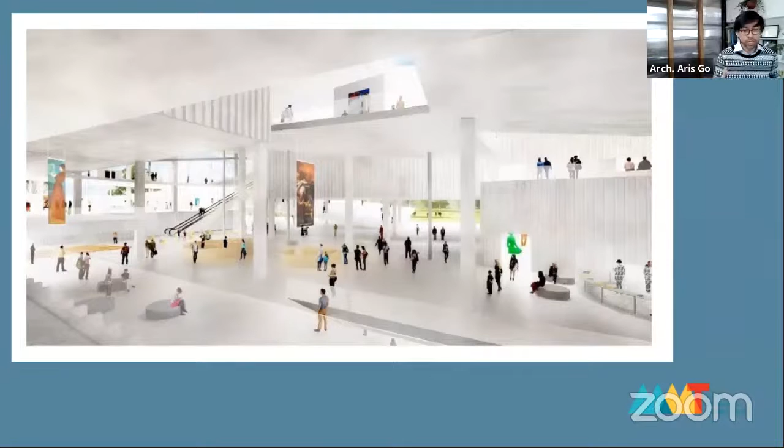It can be a place for confrontation and challenge, a place for contemplation, a place for study, or a place for rest, or simply an opportunity for dining, meeting up, or even shopping. So as we shall see, how we put together a museum can distinctively define it.

In this module, we've selected some aspects of museums that are of interest to us. Afterward, we'll discuss the more particular and specific considerations that can be unique to a project. I'll be ending with a few case study projects that we have done, including the Museo Kordilyera.

The experience of artifacts is inseparable from the spatial experience of galleries where they are exhibited. This interaction of the building form and the exhibits gives each museum and each of its galleries its own character. So this is a project we proposed for SEARCA in UP Los Baños last year.

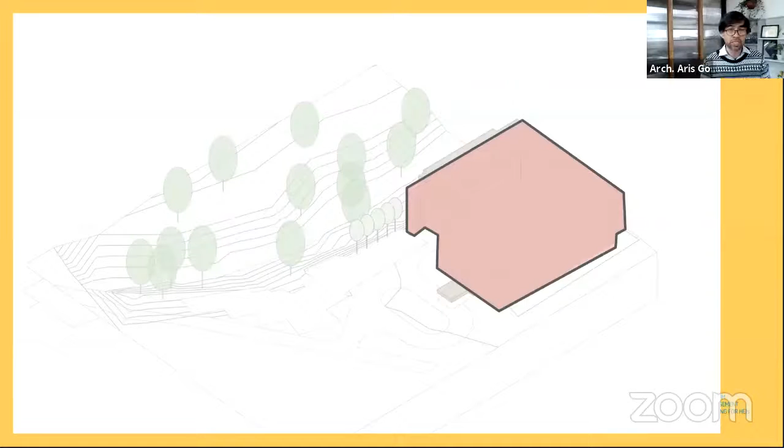They were looking into adding a museum structure to their existing building, which was already in the initial stages of construction. Before proceeding with the extension, they requested us to propose a design working with this narrow section of an existing parking lot—this section on the left.

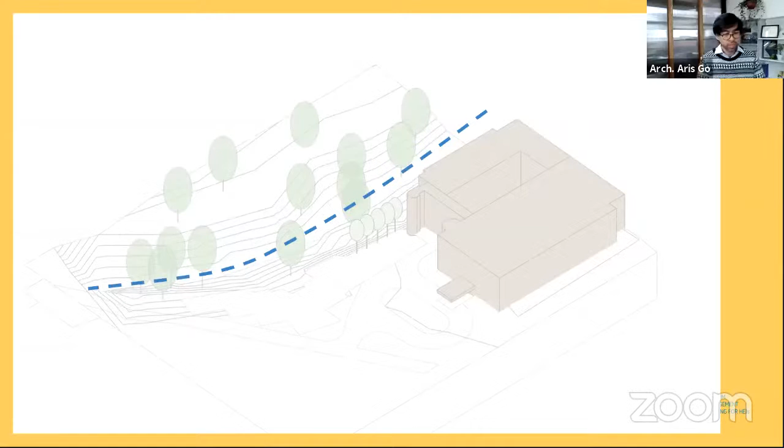This is located between a heavily planted creek behind and a driveway in front, so it's a very narrow section, only around 7.5 meters.

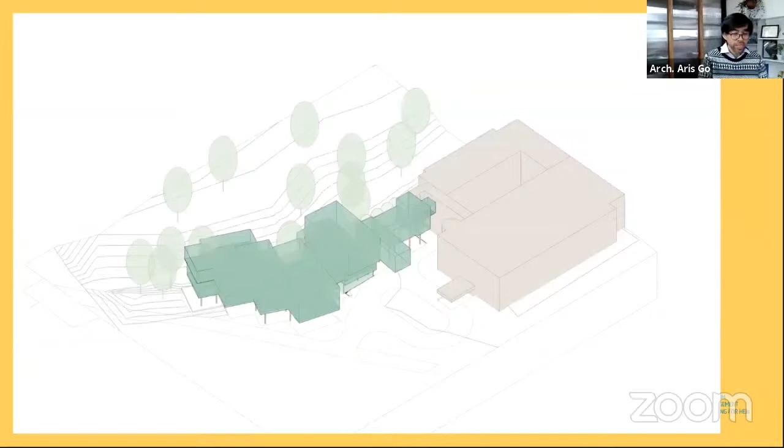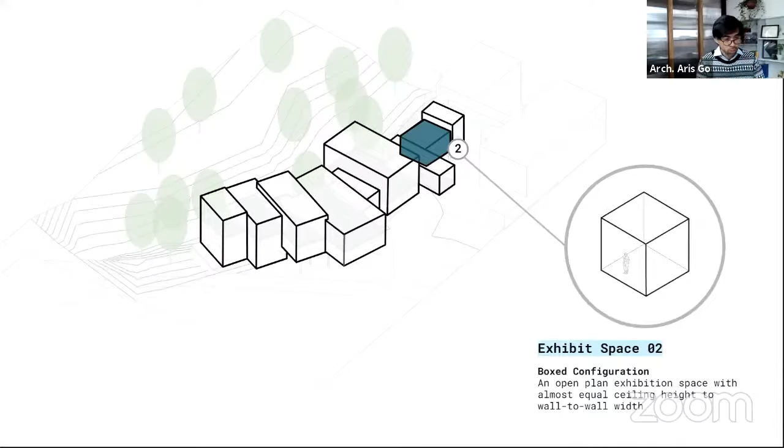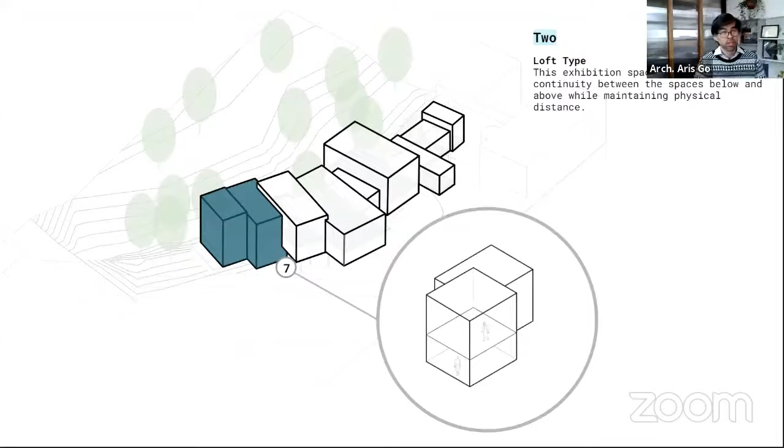So what we proposed was to have various galleries in succession through this narrow lot, while retaining most of the open space below. This creates a variety of spatial configurations: tall and narrow in a cube or box configuration, a linear box, a grand exhibit space with a triple height ceiling, an irregular box, interlocking spaces with a slight difference in elevation, and combined boxes with a loft that allows visual continuity between the spaces below and above.

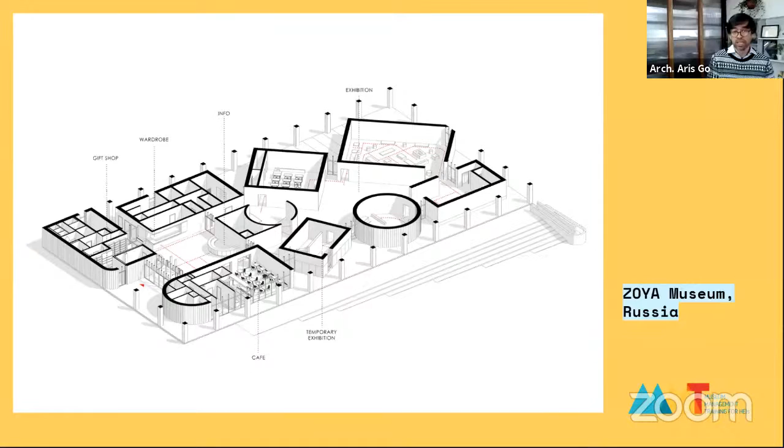By creating these varying interconnected spaces, we can minimize museum fatigue, described by a decrease in visitor interest toward exhibits. It's important to consider space adjacencies and create variation in light and spatial configurations between circulation and exhibit spaces, because monotony may lead to operational efficiency, but it can also lead to visual and emotional fatigue in the users.

The variations of openings and exhibit spaces can create comfortable visual transitions for visitors and potential views of the outer environment, acting as a point of relaxation for the eyes, but also elicit emotional responses as the spaces expand and contract.

Another consideration we think is very important to a lot of projects, not only museums but also other buildings, is how people would access it.

This is through transportation. Here in the Philippines, a great majority of our transportation needs are met by cars, buses, trucks, and jeepneys, and probably a negligible amount via trains and mass transit systems, which are limited to highly urbanized places like Metro Manila. We've been extremely dependent on cars, and providing parking spaces has in most cases been high on the list of priorities because there are limited options at the moment.

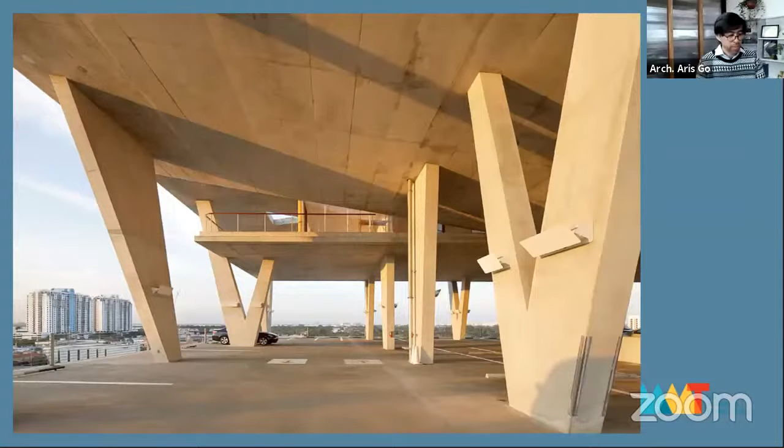This is a building in Miami—the Lincoln Road parking building exemplifies this well. The garage is a fully open concrete structure, and ceiling heights vary between standard parking height, double, or even triple height, as pictured here, in order to accommodate other programs permanently and temporarily.

There are retail units and private residences located on the upper levels, and the structures can also be used for parties, photo and film shoots, fashion shows, concerts, and other social and commercial activities, all while offering amazing views as a backdrop.

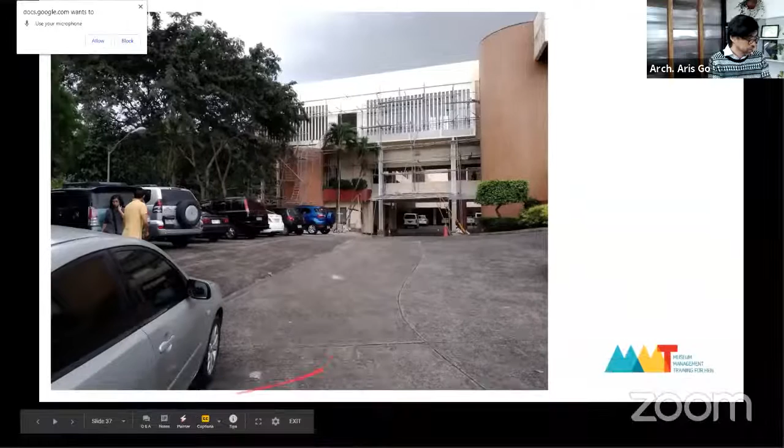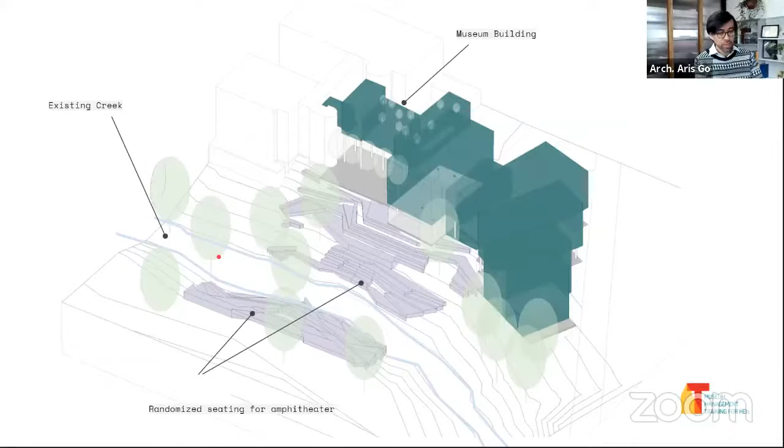Going back to SEARCA's museum, the management decided to still have parking at the street level because they wanted to maintain it in this area, despite having other parking options elsewhere. But we decided to propose an alternative that would be better for the project and the people using it, taking advantage of an otherwise dead space.

By leaving this space open and creating a public plaza connected to the creek behind the building, we designed this connection by creating an amphitheater-like valley that functions as an activator space, allowing people to rediscover this once neglected space.

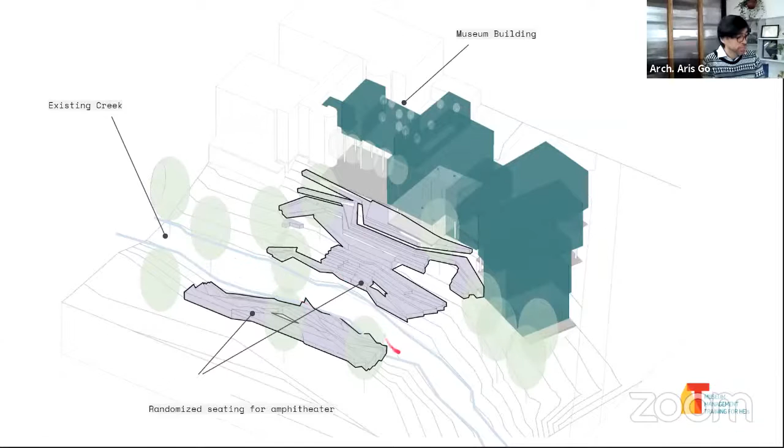Our hope is that in this rediscovery, people would be made aware of the creek that is otherwise relegated to either being a storm drainage or a sewer line. This would not be possible if we simply accepted it as a parking lot or let it remain a parking lot. We wouldn't be able to create this kind of connection.

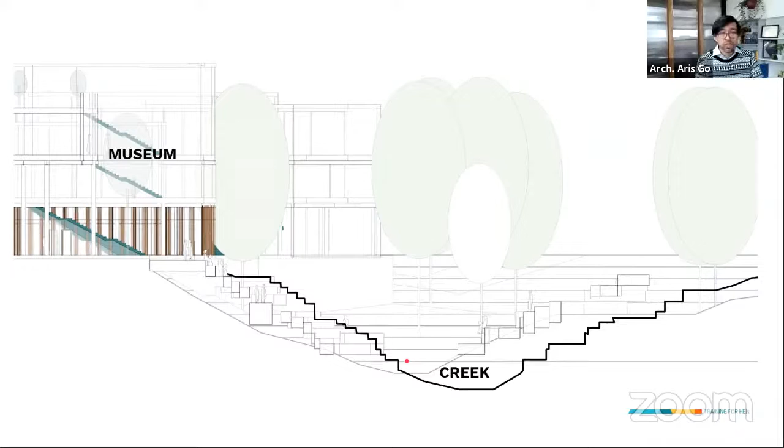Now think about this in your own city or town, wherever you are. Most of our towns have creeks like this running through the middle, or bodies of water running through our cities, which we ignore, neglect, or sometimes don't even see. In the case of Manila, they're all underneath the concrete.

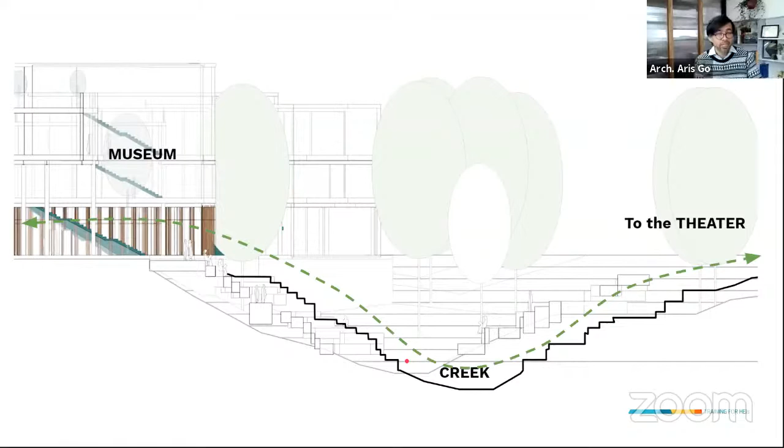So what's good about this proposal for SEARCA is that directly behind it is the UPLB Theater, the Umali Hall. You can just imagine the possibilities here. With this kind of connection, we could interconnect them and create an outdoor theater. So we have a museum, an outdoor theater, and a creek between them, although of course the creek will need cleaning—well, it needs it anyway.

So it rehabilitates and changes people's ideas or concepts of how we use our creek. Instead of having fear, we embrace the creek, and instead of creating concrete walls, we create amphitheaters so we can use it during non-storm circumstances.

Another aspect to consider when designing buildings, especially museums, is daylighting. Employing daylighting, with its characteristic color rendering, cannot be easily replaced by artificial means, because its continuous spectrum illumination from natural light provides unbiased color registration for all colors. Although there are variations in daylight throughout the day, the human eye can easily adapt to these changes and maintain accurate perception of an object's color, especially with daylight.

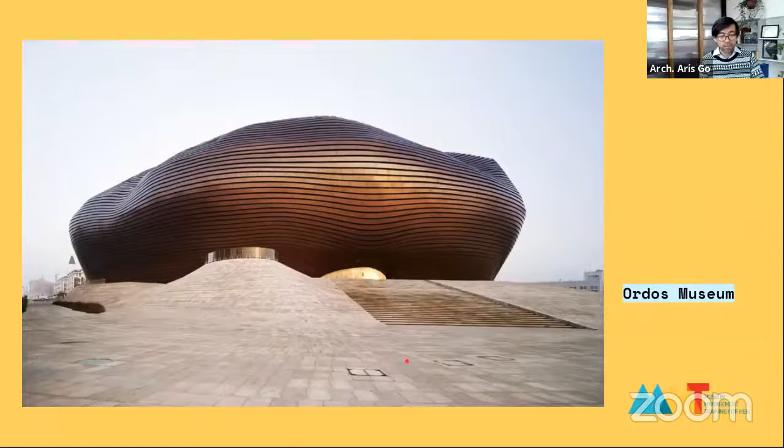Another thing to consider is iconic buildings. Within the last decade, especially since the Guggenheim Museum in Bilbao in 1997, there has been this class of museums whose civic role has been to become symbols or icons of cities and cultures, designated by their own architectural identity and value. In most cases architecture like this is good, and sometimes the building itself is the artwork, creating a place of mass attraction. This has sparked a lot of debate among designers and architects regarding the merits of creating something iconic, so careful consideration is needed whether to go for something like this. It might not be for everyone, so within the bounds of context it should be considered very carefully.

We should also think about urban regeneration when we think about museums, because museums should be thought of as engines of urban regeneration, offering public spaces for people. In most of our towns and cities, public spaces have been reduced to mere display, sometimes none at all, replaced by large air-conditioned malls. So the museum of today should not just be an elitist bunker that stores artifacts and presents them to a specific, highly educated audience. It should be a public space where people can gather and meet, catering more to the public rather than an elite few.

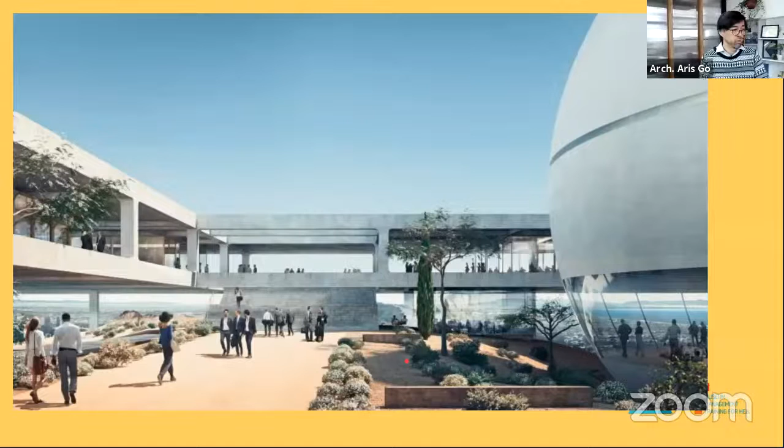So the following are a review of some of the places that we've seen, and some of the places that I think you should think about and put into your consideration.

One is the Sao Paulo Museum of Art, designed by Lina Bo Bardi in 1968, a long time ago. She approached this in a very novel way and it was groundbreaking for her time. Bo Bardi attempted to cater to the populist view that the museum and the site it stood on should belong to the people in the city. Not only would the museum return the same amount of public space that it borrowed, but it would embrace the radical notion that the museum could both exhibit culture and serve as a stage on which it was created. By lifting the whole museum above street level, the open space created turns into an extension of the city, given back to the city as a public space for people to use.

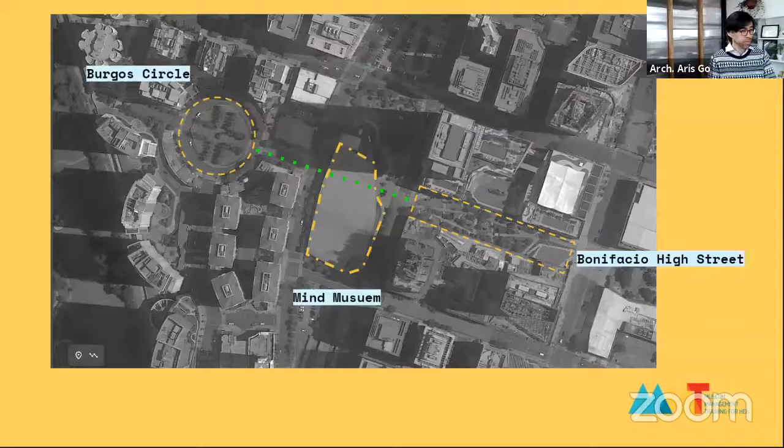They could open up this space, create cafes and restaurants all around the building so that we can invite more people into the space and possibly enliven the urban fabric of this area.

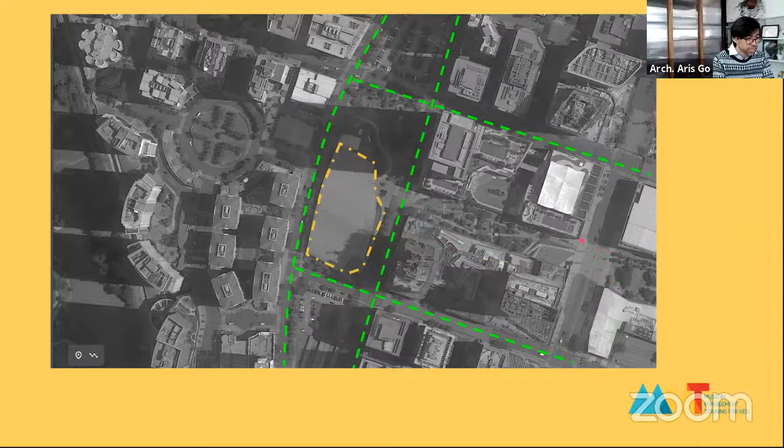So for transport, if you see here, the lines in green are cars. This makes the Mind Museum virtually an island. But by strengthening all of the pedestrian connections all around it, we can increase the connections to pedestrians and increase pedestrian traffic within this area. Possibly fully pedestrianize this area, much like what they did here along High Street. That would be best.

The next one is the Ateneo Art Gallery. This is Arete, the Ateneo's cultural hub. It stands near the entrance along Katipunan, and it's the building that welcomes people. You'll be able to see it on the road, but you won't be able to directly enter it from the road. You'll have to go through some loops, as I'll show later.

So these are, I think, aluminum slats, cladded on the west side of the building, which reveals an odd transition to a box portion of the building.

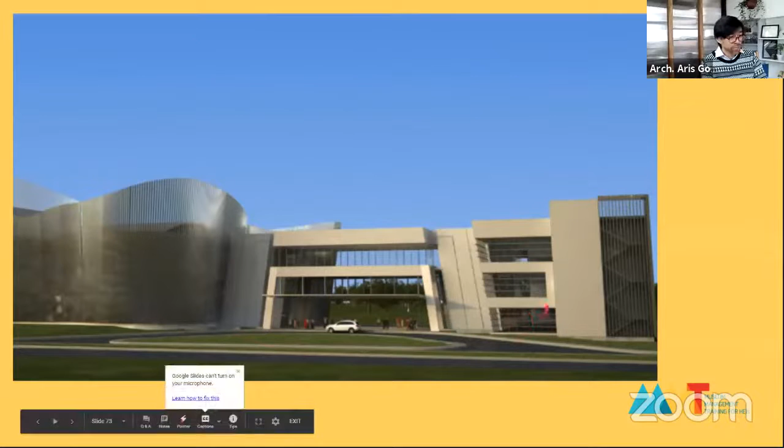But the good thing about this one is that they introduce a large plaza at the middle, for gatherings and events with larger crowds. This is a rendering of it. I think the symbolism here was that one side should be science, which is rigid, and the other side is art, where it literally converts the idea to the form of the building.

But if you observe it here again, it's still disconnected from the street. We would prefer to have more connection, because you have a large plaza here, and this shouldn't just be your connection to the public. You should have most of the building open to the outside so that it doesn't just become walls. By activating these areas, we create more spaces all around the building instead of just parking or just a sidewalk.

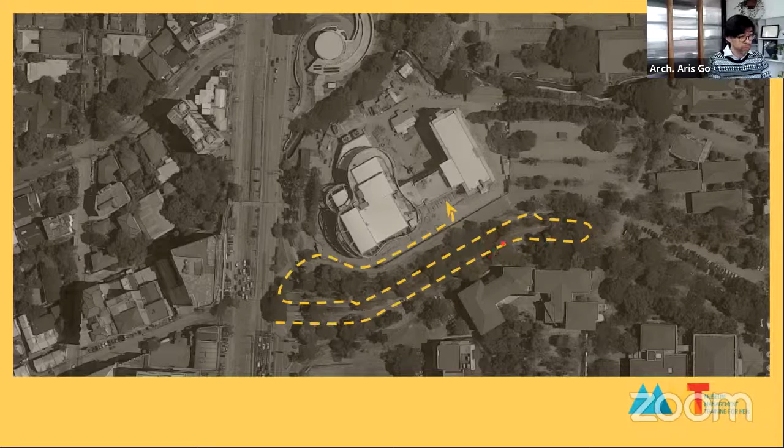This is the pedestrian circulation, which is better, but we think it can be strengthened even more because you have this large plaza at the middle, and this plaza needs some sort of connection to the larger public. Creating a very strong pedestrian connection between these two buildings and the buildings across it will further enhance the connection of the pedestrians. It also enhances the public space quality of the building.

If you take a look at the parking space, they've located it here, where it's quieter. I think they should locate the building here instead of here, with parking here, and you have a row of trees that protects along Katipunan Road. But this is the decision they made. I think it's more strategic, in my opinion, to put the building on this side where the parking is now, instead of where it currently is. Probably because they want the building, especially the arts building, to be seen from the outside. I don't know.

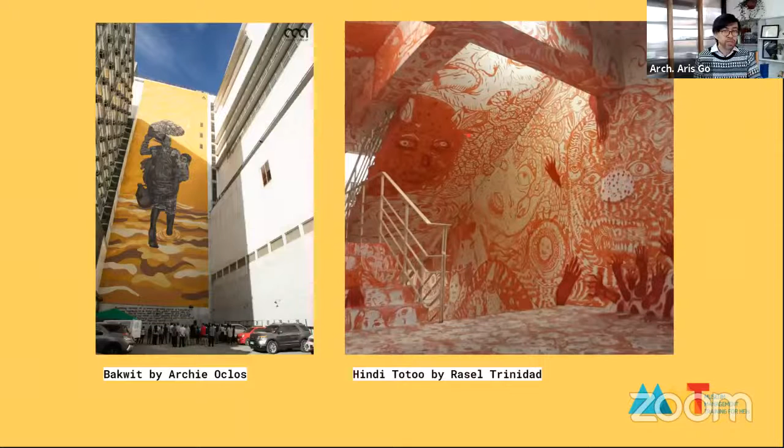So the walls of most, if not all, of the building's interior were intended to become the gallery itself for the students. With the walls painted generally in white, some walls would provide blank canvases for different artists. Like the whole stairwell, they painted it intentionally as a blank canvas. Students are allowed to propose and create projects around these open, white spaces.

They also have places for galleries and exhibitions, containing areas for both temporary and permanent exhibitions. Drywall panels can be easily installed on the walls and easily repaired, so this can be used by several generations of students. Essentially, the whole space becomes a blank canvas.

The next one is the Baguio Museum. If you look at the design silhouette of the building, it harkens to the Ifugao hut. The design extends throughout the building, and the exhibitions inside, I think, are unintentional. But what's intentional is the vernacular house design it's based on, mixed with a sort of Baroque-ish style in the interior, which is probably the unintentional part.

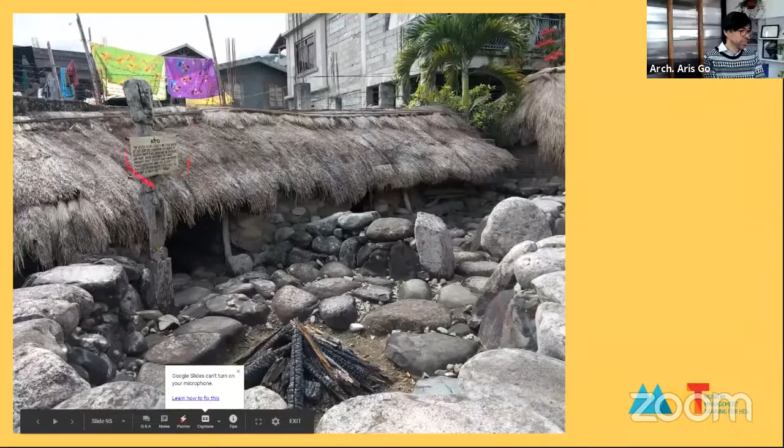So including the houses, and then they have certain descriptors, and you even see at the back people hanging laundry. But what's also interesting is that they've not included the more contemporary additions into the exhibition, like the American houses, which are right close by. I think they should add it as well to create some sort of timeline.

Because sometimes we in the Cordillera are too obsessed with our native past that we forget that we have this continuity as well, the continuity of the culture.

Again, another one is the SLU Museum. I won't be saying a lot about it, other than it looks like an antique shop.

So I'll be going through very quickly some of our proposals for the city and some projects we did in the past. Since Baguio City has been declared a UNESCO Creative City in 2017, the city required a creative hub of galleries, a museum, a workspace for the artists.

So this place, the former Diplomat Hotel on Dominican Hill, could be seen practically all around the city, or it used to be seen. Now it's covered in pine trees, so you won't be able to see it as easily as before. We used to see it when we were kids, but now because it's surrounded by pine trees, which is good, you won't be able to see it as clearly.

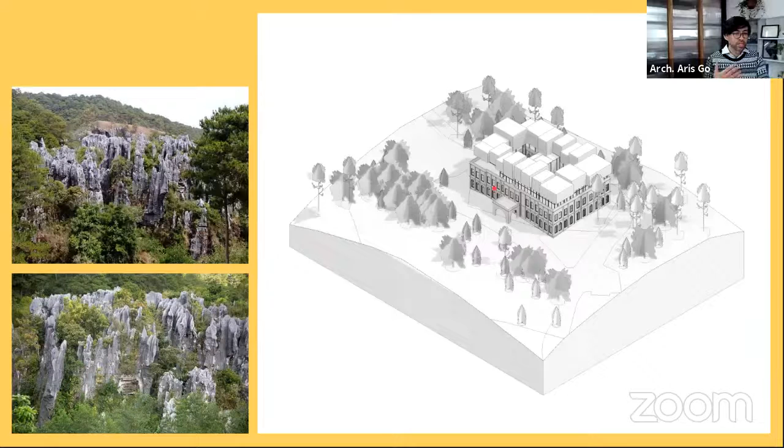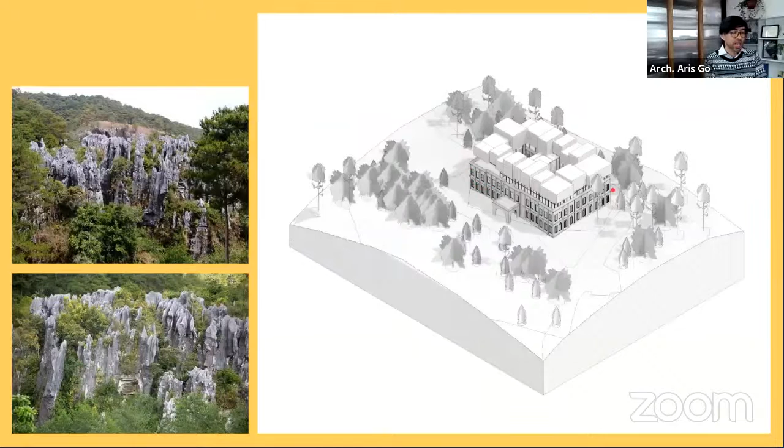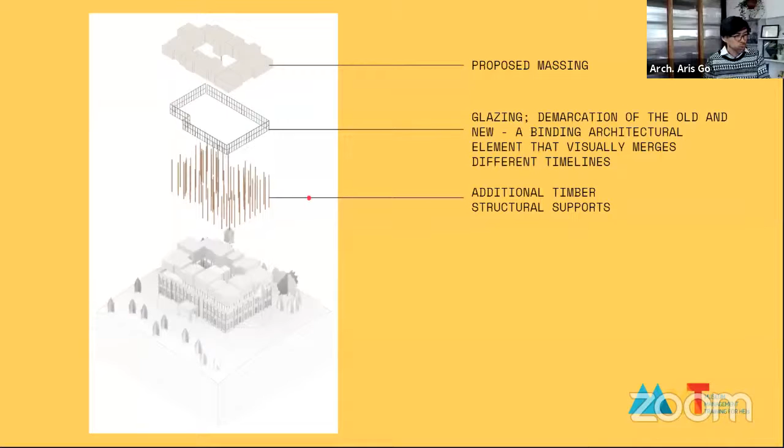The plan was not to do much with the existing fabric and have the existing building retain it as a ruin, and reinforce it. Instead of reinforcing it with steel, we propose to reinforce it in timber as the structural support.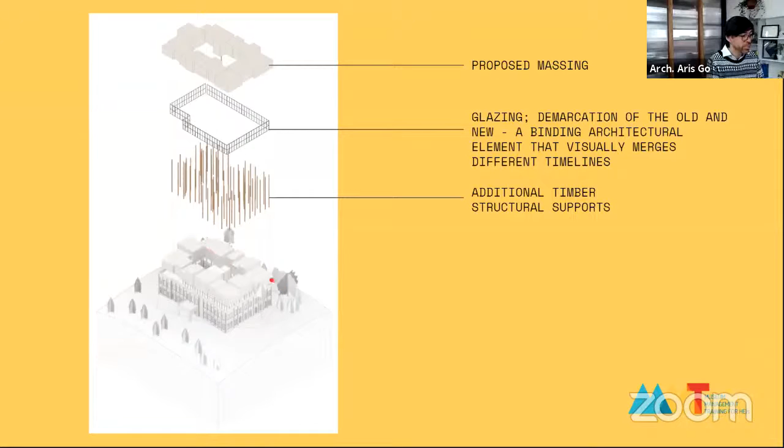This creates an unusual contrast of material between the existing concrete and steel building with timber. Then we clad the upper floor with corten steel, or weathering steel.

So we would have exhibition spaces, workshops, offices for creatives on top of the building. The idea was to recreate some sort of community on top of the building, much like our traditional Cordilleran communities, where we have a very connected and very compressed space.

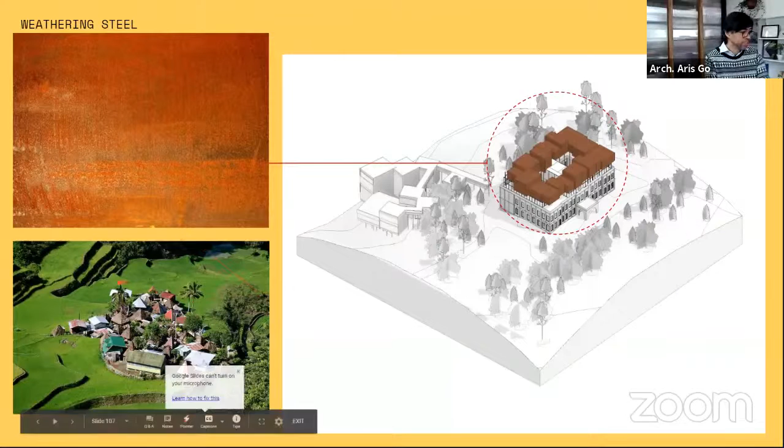Within a very compressed space, we establish our communities, and then use the new vernacular of using rusted steel. If you notice the houses here, especially in the Cordillera, utilize a lot of GI sheet and steel on the exterior because of its lightweightness, and they're able to carry it easily on very high slopes. So this is very ideal, and we did the same thing and clad the whole building with the same material that the new vernacular uses.

So this is a rendering of the facade of the building.

We also proposed a conceptual master plan for the Bagong Nayong Pilipino. Instead of having an outdoor museum that's more Disneylandish, recreating sites which can be visited, we would get from Filipino culture, not literally, but recreate Filipino landscapes, recreate Filipino urban conditions, creating different Filipino landscapes.

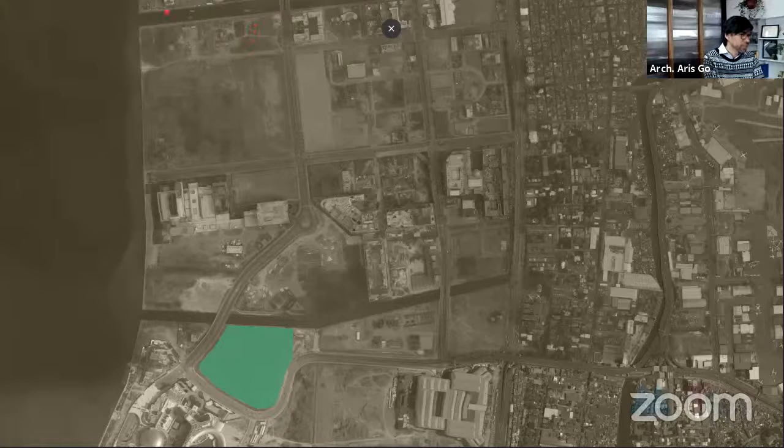So the location is very near SM MOA, or Mall of Asia, which is above here, and it's very close to the sea.

Our proposal, because of its close proximity to the sea, is to raise the whole lot by a significant amount, so that we would be able to plant several different types of forests on it, giving us a fair distance between us and the highly saline water table, since this is reclaimed land. That 4.5 meters allows us to plant a forest.

And then, before that, we will establish—because the major transportation, as I discussed a while ago, of our country as of now are using cars.

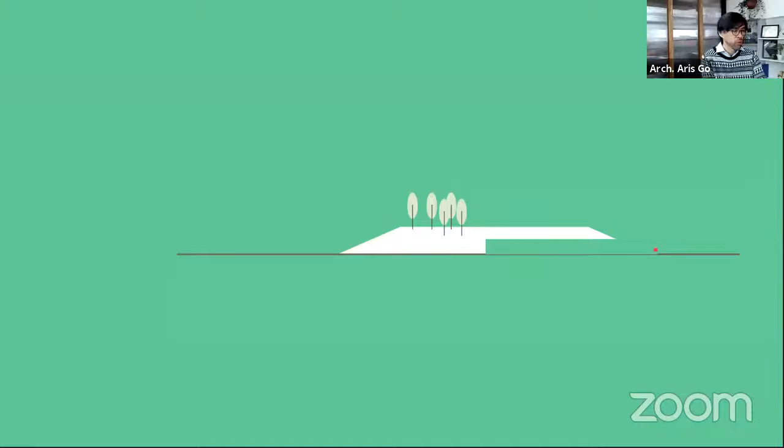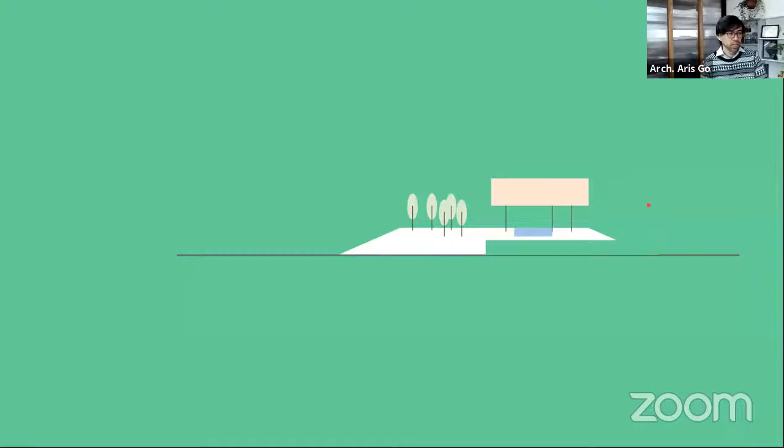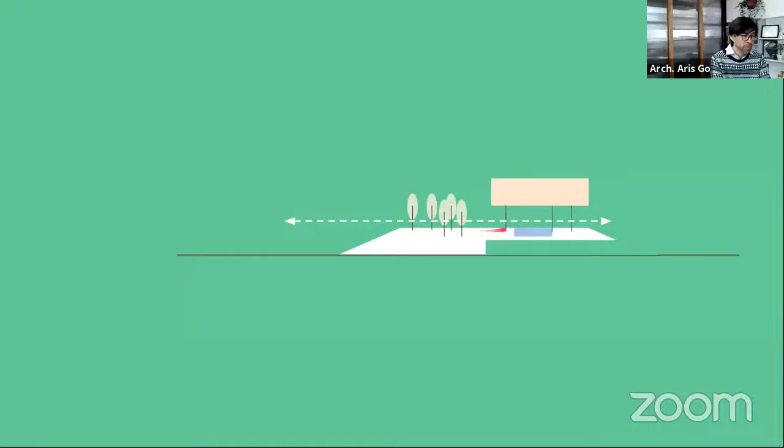So we assume to have a large parking lot underneath, and then create a virtual estero, and have the buildings, instead of on the ground, raised to a certain level, and have that shaded, so we have a whole park that is both a forest and a shade where people can use it, especially during midday, because parks are essentially unusable during midday or the middle times of the day.

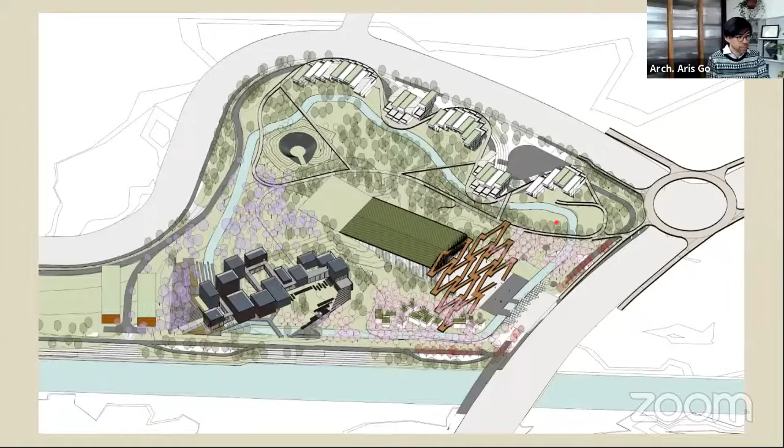So this is our whole master plan for that space. We establish a whole estero. We wanted to have more connection to our bodies of water, so in a way the place would teach people to value our bodies of water. By creating that estero all around the building and the property, we are able to create an experience, different types of experiences.

The estero runs all around in some ways through an urban quarter here. Then on the left side you have a forested quarter, and this quarter we propose to have flowering trees instead, an array of flowering trees in the front side of the property.

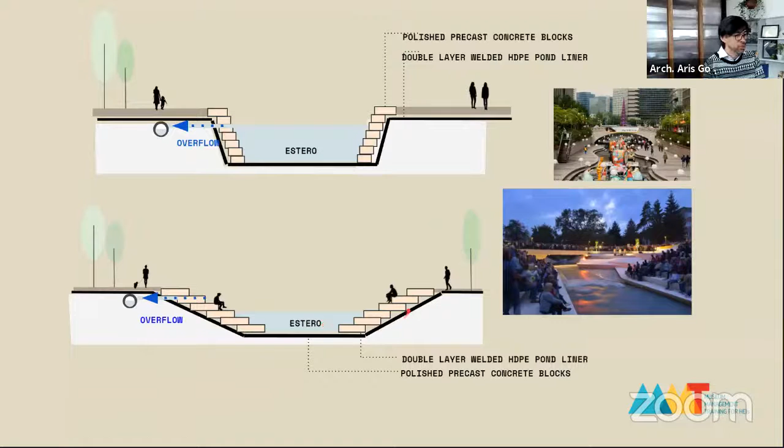So having that estero, we can activate the zones all around it, and the estero becomes our main street. Instead of having walkways, we have more connection, and you can imagine events here like fluvial parades, etc.

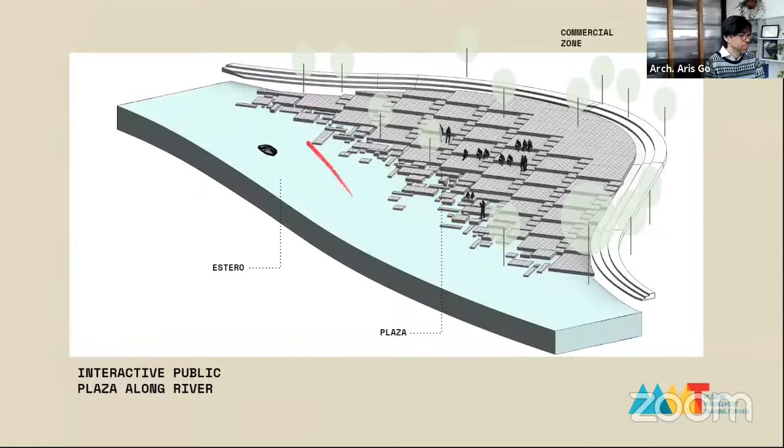So there's increased connection of the people with the water. Instead of having barriers, we would like people to engage, because this is only around 4 feet, so people can safely navigate this space.

Another proposal of ours was to create a plaza, but not just a plaza. Part of the idea in urban planning of our smaller towns, especially the Hispanic colonial ones, was that they had the plaza, but the plazas were built like in Europe, unshaded, so sometimes people weren't able to use these places. We wanted to have that, but create shade.

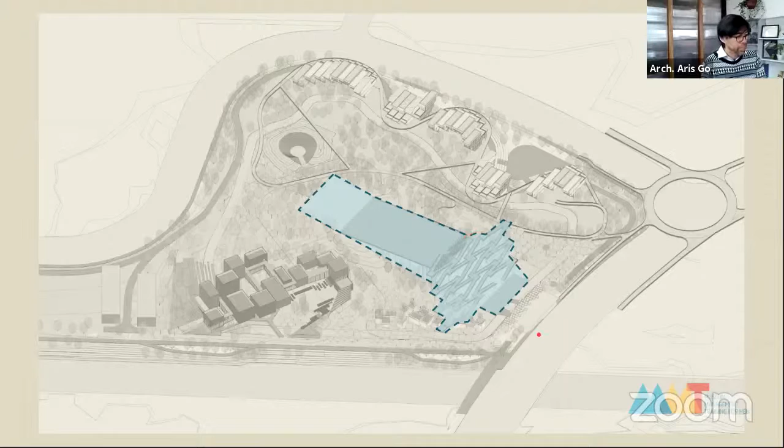So what we did was put the plaza down and the shade above. We designed a series of ramps that go up into the building and create a sort of mountain, forming a grand lawn, which could at times become a viewing platform for theater events or performances, filled with people from down here.

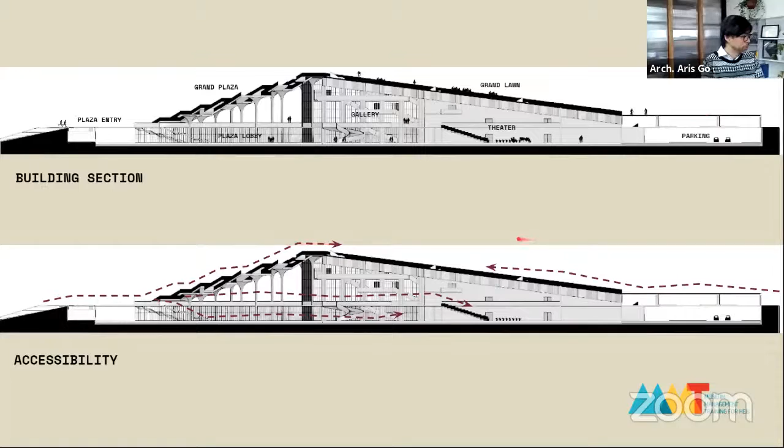The idea was to create a connection, not just a roof above the plaza, but the roof also doubles as a ramp going up into the grand lawn. The lawn won't just be flat; it would be tiered or sloped so it can function as a theater of sorts.

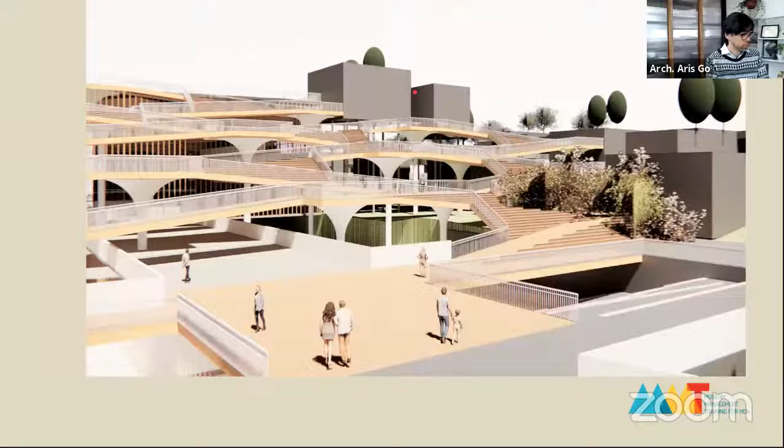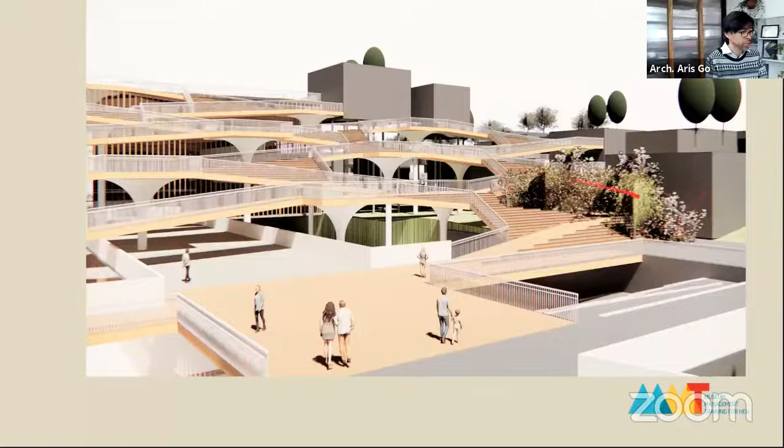So this is the public space entering from below. People are able to climb up from different spaces, surrounded by flowering trees. And this is the museum, with the entrance to the museum here.

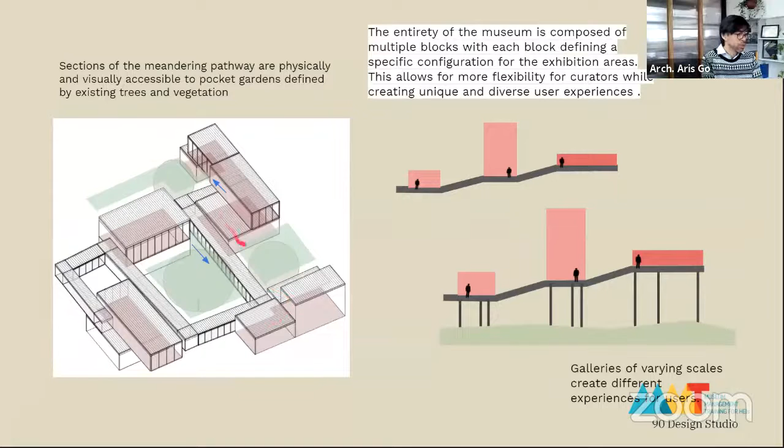At the same time, as we did for some of the other buildings, we put them on stilts so people are able to use the ground floor easily. The ground floor becomes an open park, and the museum meanders up, with a series of ramps undulating around the exhibition spaces, connecting them while maintaining the open park underneath.

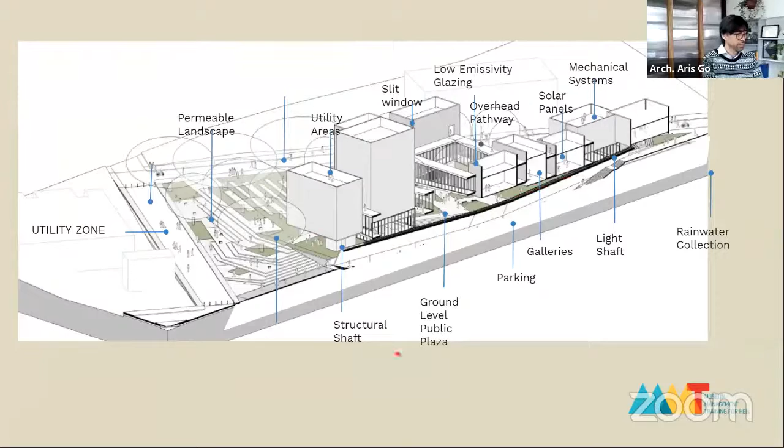So that was our proposal for the conceptual design of the Bagong Nayong Pilipino.

The last one is Museo Kordilyera. It was intended to be an extension of this building, the Galerya Kordilyera, where they had intended to have exhibits, but instead of exhibits, they used it as a canteen.

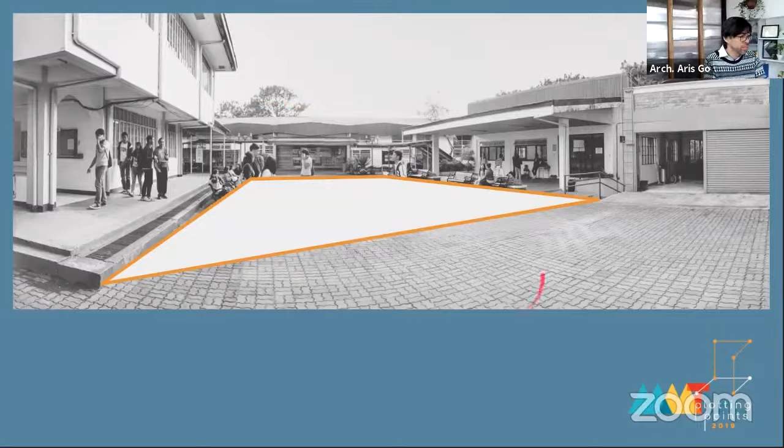So they wanted us to do a building either here on this side, on that side, or here in front, but we decided otherwise. We thought that instead of having the building replace this public plaza, since we wanted to maintain it, we would recreate this one to be the entrance, and the museum would be underground.

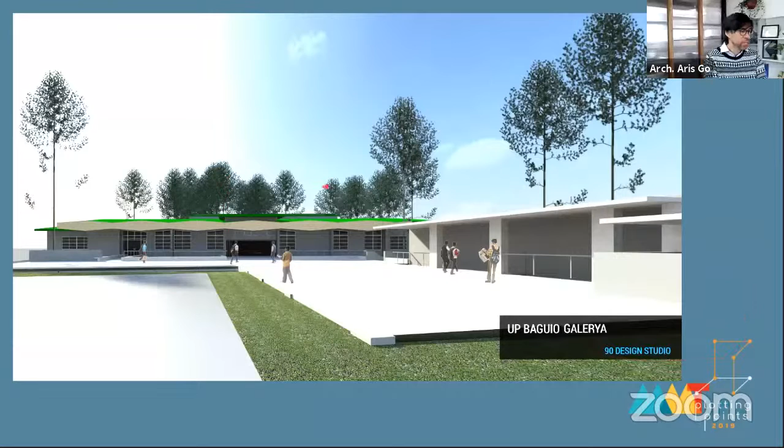These were our first renderings of the building. We did this design very quickly, with only around a month's time to do the whole design, so these were very quick renderings of the idea. This was what we presented to the council.

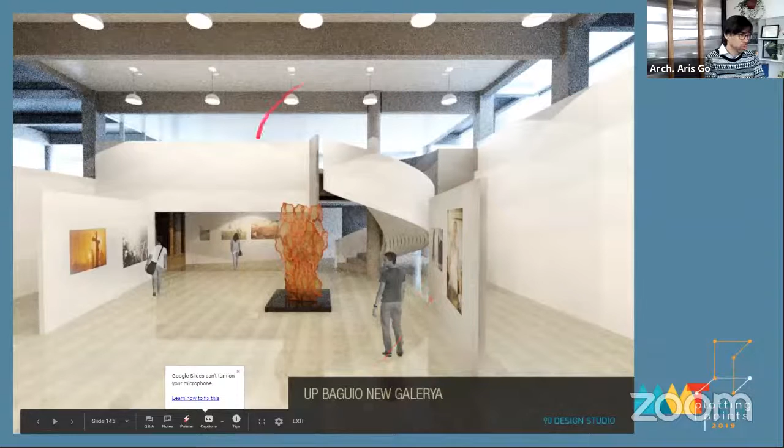Here, the museum will be underground. This was also one of the first renderings that we had of the museum, and again, one of the first renderings as well.

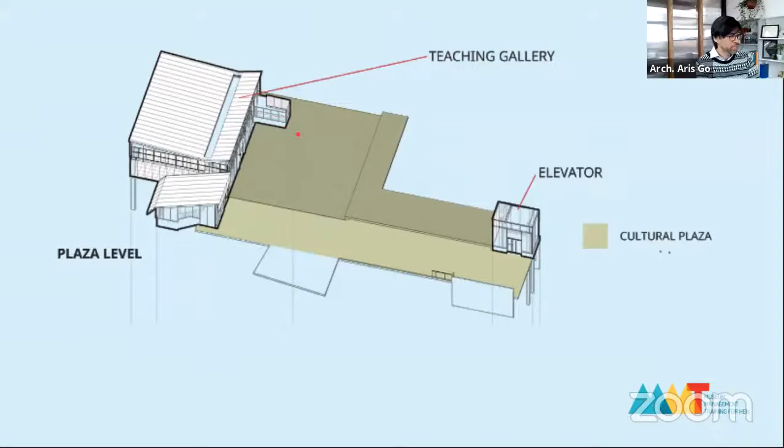So this is the entrance building. The entrance building is, in a way, the third level of the existing theater here on this side. Then you go down through this area to the permanent or main gallery, and then you have utility areas here, and we intended to have an audiovisual room and storage room here.

Then we designed a visible storage because the space was relatively small. So instead of having walls to cover the storage, we had glass walls instead, so it becomes a visible storage.

There, these are some renderings of the building. At that time we were also designing the adjacent building, which will become the cultural hub, which I will discuss later. The timber that was demolished there, we put them and redesigned them to be the roof rafters and trusses of this entrance building.

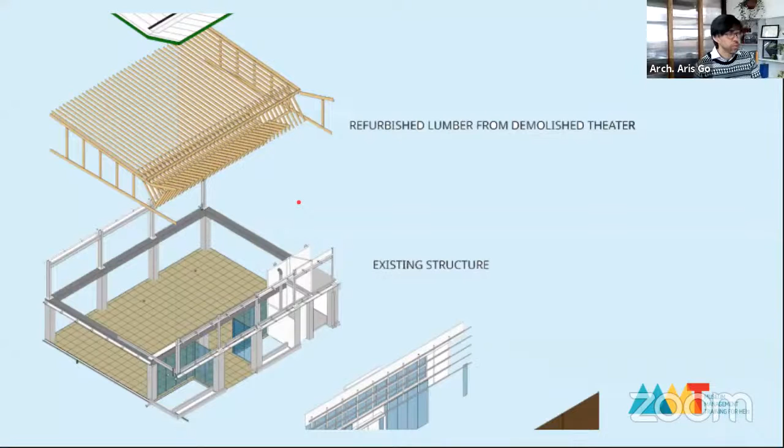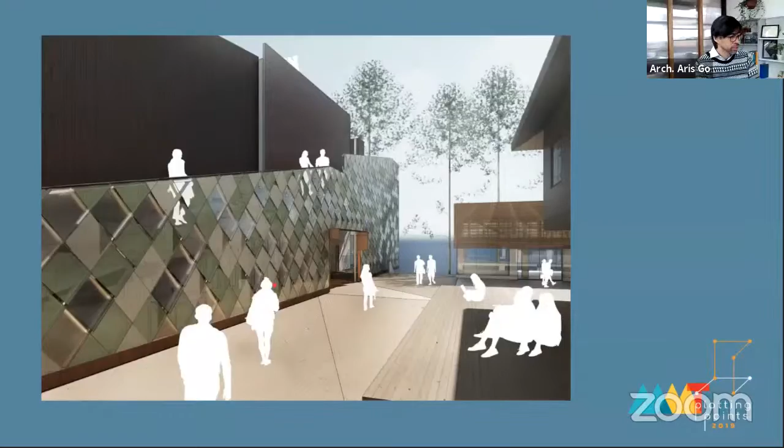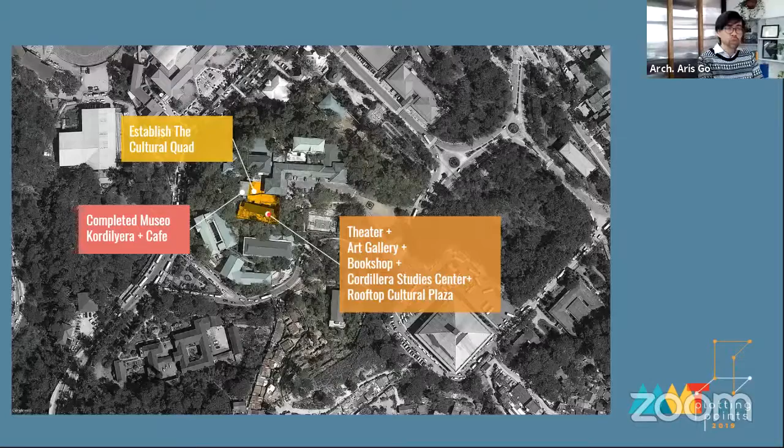So the Museo Kordilyera was part of the whole idea of having at the center of the university a cultural hub. Part of that cultural hub was also to rehabilitate the existing Bulwagang Wanduna, which becomes the theater. Underneath the theater is an art gallery, a bookshop, and we moved the Cordillera Studies Center from the other side of the campus to this part as well, so that we centralize all of the cultural thrusts of the university in just one quad.

So this is the Bulwagang Wanduna. The idea for the Bulwagang Wanduna is to have—because the UP Baguio campus is very small, we identified, but we still wanted to maximize the space that was available to us. So we established a rooftop park on top of the building. But instead of having just a flat roof, we tapered it, shaping it like the mountainside across, so we shaped the roof of the building with the topography that we see all around it.

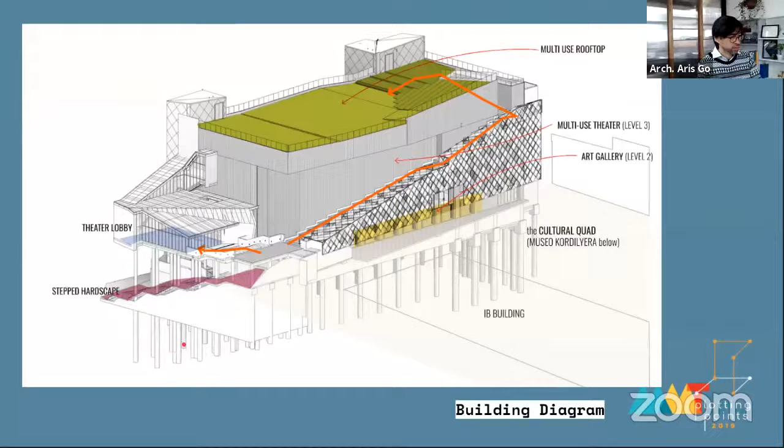And then we established a stepped hardscape that connects down to the library here. So this is how it looks now—it's under construction. This is the step, these are the steps that go up to the roof of the building. So these are the rehabilitation works that we had to do.

What's interesting here is that because we inserted this whole structure, the roof of the building, between the beams and columns of existing buildings, we had to do very deep 9-meter piles all around the building, and then build all around it, bring them all up, then establish trusses that span around 18 meters to cover the whole building, so that we can establish a park on top.

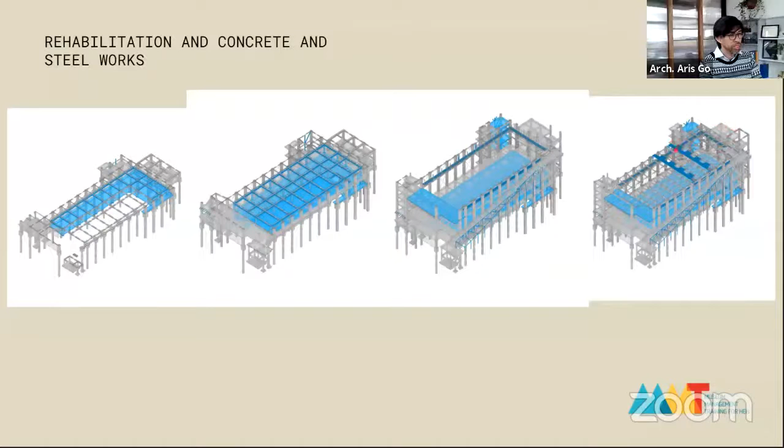So this is level 1 at the basement. The basement level connects to Museo Kordilyera directly, so this basement level can become an extension of the Museo Kordilyera, in the gallery as well.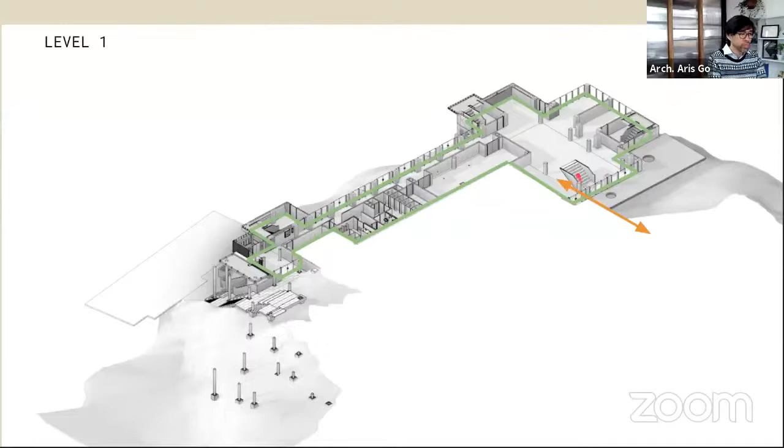These are the stairs that go up to the next gallery, and then we have a distinct space here, an exhibition space that is double height. We established that for special circumstances. This is the Cordilyera Studies Center, where

you have a bookshop as well that directly connects to the gallery. This becomes the art gallery, which may be an extension of the Museo Kordilyera as well. Instead of having a closed gallery, we wanted to have a gallery that's open to the deck outside, which is covered, and connects to the Museo Kordilyera on this side.

So the curators would be able to hold art exhibits that can be fully open or optionally fully closed, whatever they deem would be necessary.

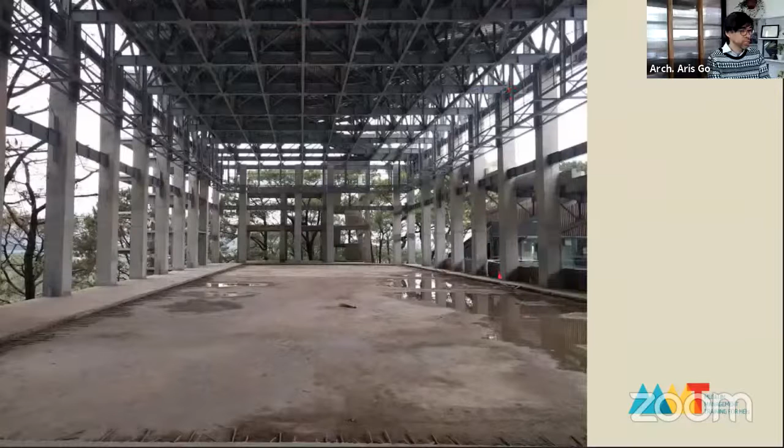So on the 3rd floor of the building is the theater itself. This is the theater—we expanded it. This was the old footprint of the theater, and we added a few meters to the sides, where we had piles down here to bring it up. So the structure above is separate from the existing building here.

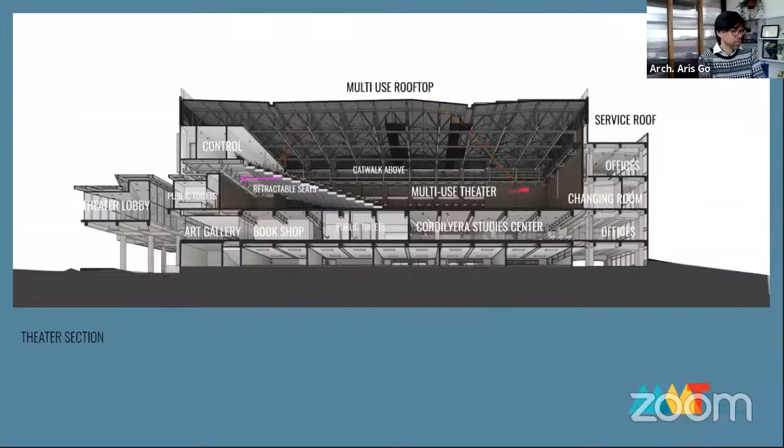We wanted to still maintain that multipurposeness of the theater, so we designed retractable seating, so that all of the theater seats would compress to this area, so it becomes just an open space. So you can have a proscenium style theater, or you can have just an open multipurpose hall, and we designed it with adequate acoustic insulation.

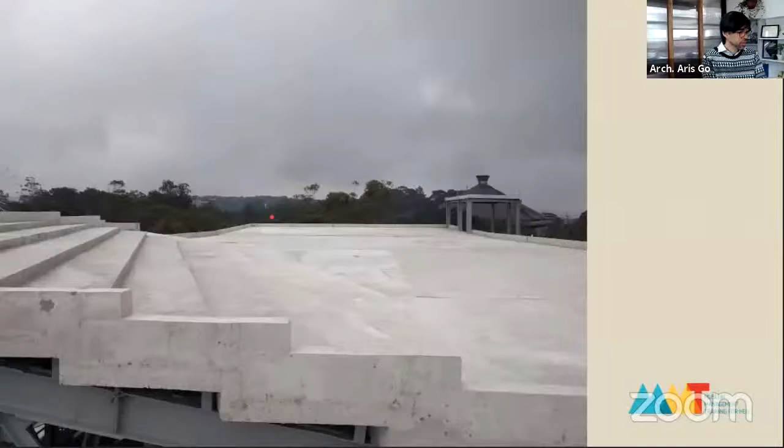So for the entrance building, for the rooftop, we designed it to have some planting, and it becomes a landscape, places for outdoor lectures, etc., or events. This is the roof now.

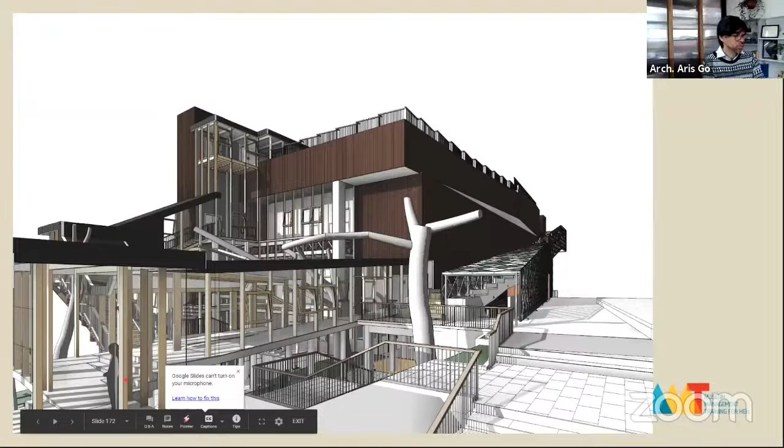So for the entrance lobby, we decided not to cut the three large pine trees all over the site. So instead of having a regular box lobby, the lobby was sort of a series of ramps, a series of stairs, sometimes very convoluted because of the shape of the building.

So we did not intend it to be iconic in itself, but we intended it to be defined by the shape of its environment, not by anything else.

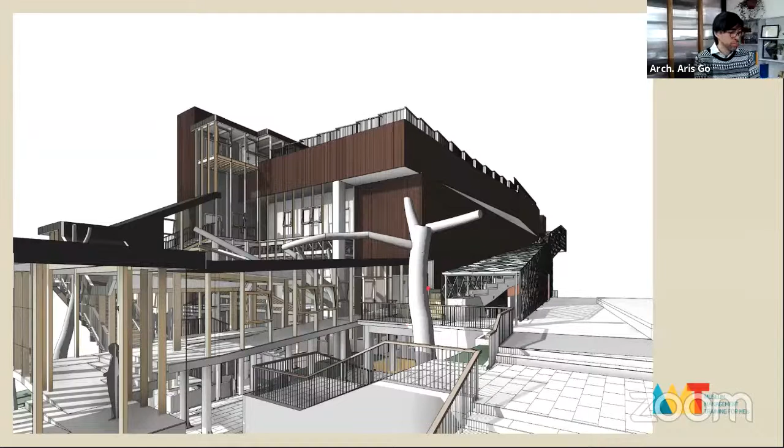This is the lobby. You see several ramps that connect from the entrance up. At the same time, you have a ramp and stair combination where this can become a seating and waiting area. Then we have a split level, one going up to the theater and the second going down to the galleries. And then another entrance on the other side here.

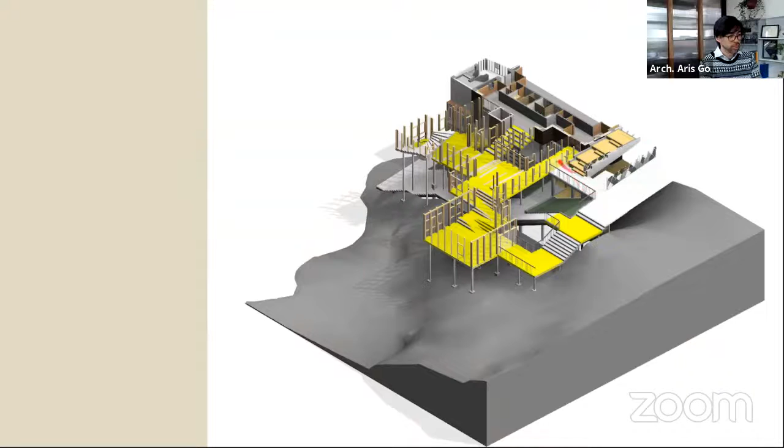And below the entrance, the building would be on stilts so that we can use the underside of the building as an open public space, also a connection to the adjacent library. So the structure would be all in timber except for the floor, which will be in polished concrete.

So I would like to conclude with some commentary on the upcoming Freedom Memorial Museum, announced several weeks ago. When we saw it, I just wanted to say something about it. I hope it does not upset some people, but considering this is an alternative view, I think our freedoms would allow us to do this.

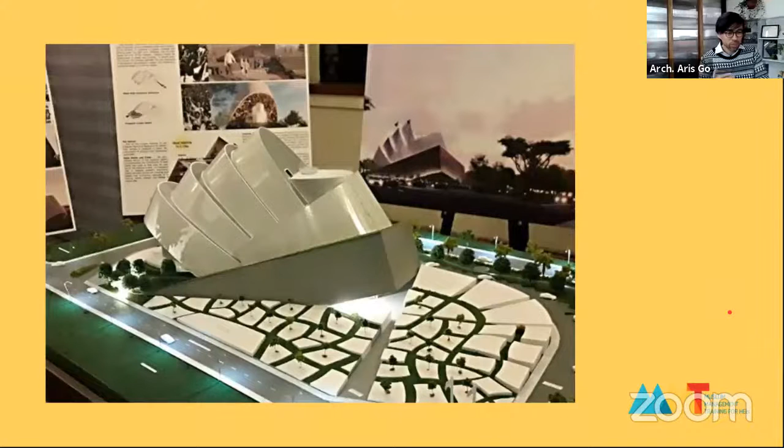So this is the new design for the museum to be located within the UP Diliman campus, which should be constructed soon. It's located adjacent to the Fine Arts Building, and you can see in this series of images how the building is distanced from the public, from the street.

So I think it's probably a deliberate attempt to detach it from the public, creating this expanse of landscape. It doesn't look very human in scale. It seems very inhospitable, very difficult to access, probably very disorienting, and because of the lack of shade, inhospitable.

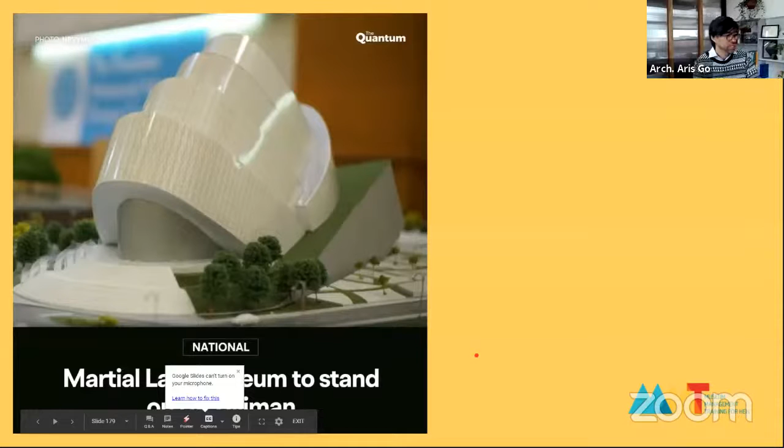You can see how architects prioritize the image of the building. I think they shaped it in the shape of a kamao. This is the trouble with creating something iconic. You sometimes prioritize its iconicness instead of prioritizing the users of the building.

So they've neglected a lot of the elements around the site, including the very large rain trees that surround the site. I don't see them on the plan. They must have completely removed them.

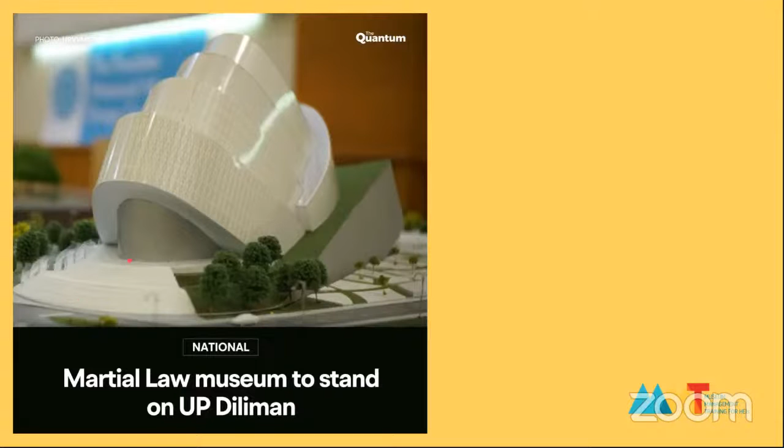And also, they had this large entrance podium, which is fine for very old buildings. We would prefer to have the building approach the people instead of the people approaching the building.

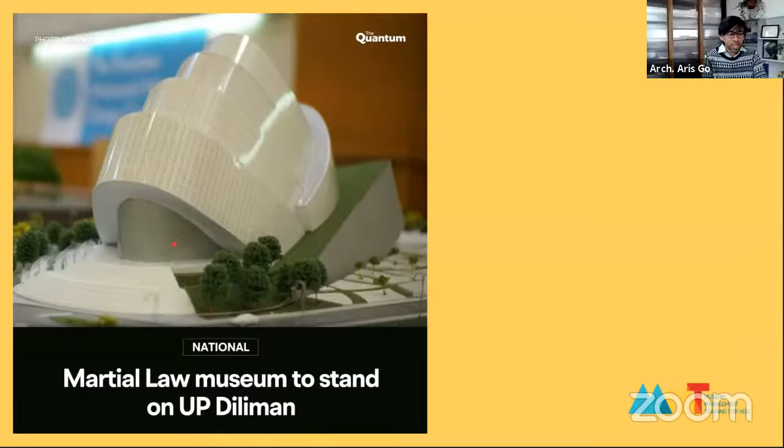So the building becomes very formidable in this sense, especially for those with disabilities. It's designed to be seemingly isolated, like an island, like a mall, where what's important is what's going on inside the building rather than outside, which becomes a no man's land. This is a big missed opportunity, especially given what the building memorializes. It's very ironic in that sense.

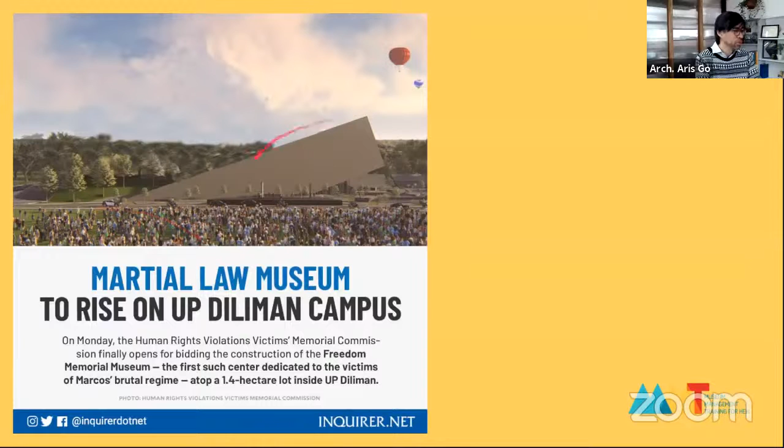Second, the building should demonstrate freedom's power and fragility. Express physically freedom's difficult climb, to maintain a vigilant cycle to preserve our freedoms from those who seek to usurp it. Here we create the whole roof of the building to allow people to climb it, literally climb freedom's difficult climb. At the end of that climb, you have a sweeping view of the landscape.